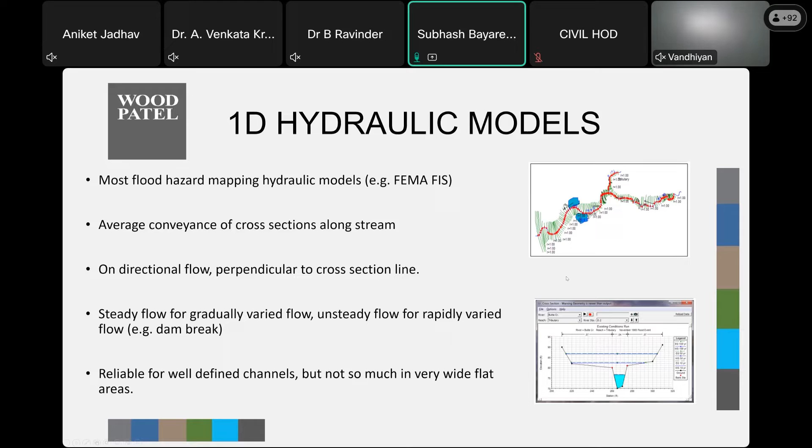Whereas with the 2D model, now we're representing the study area in the form of a 2D plane. Therefore, you can provide an elevation data set for your entire study area, and all of that will be taken into consideration within your 2D geometry. So it accounts for flow splits in smaller areas.

I'm showing a snippet here with the flow arrows showing where the flow is going. Now, if I have to capture this in 1D, I will miss out on flows that are going in the west to east direction. So that's one of the advantages of a 2D model.

And also, you're not relying heavily on the engineer's judgment, whereas in 1D, your engineering judgment is extremely important when drawing the cross-section lines perpendicular to the flow direction, and also the spacing between cross sections. And 2D models are inherently unsteady, so they always account for volumes, whereas 1D models can be steady state. Steady state means it does not account for volume because it's infinite volume.

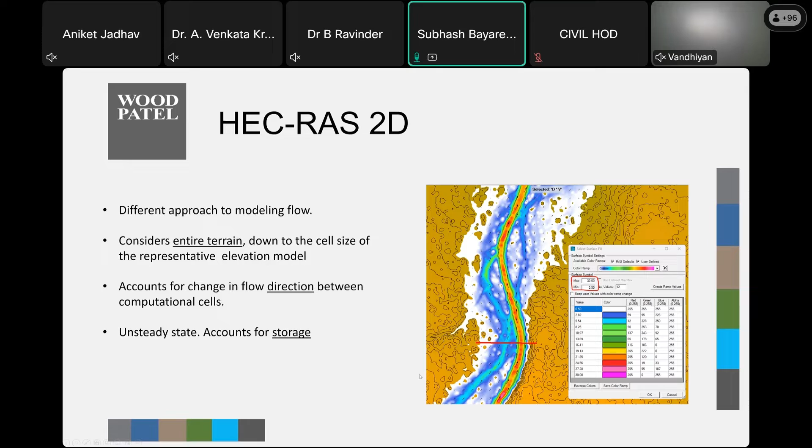Now, what data do we need for developing a 2D model? We need terrain. The terrain is an elevation data set.

Looks like another user is having audio issues. Is it possible that issue is on your end? Because it looks like the other individual has mentioned the audio is pretty clear. It's clear, sir. Please.

Okay. Obviously, when developing a model, your model is as good as your input data. An elevation data set is basically a GIS data set in raster format. Since you all have a civil engineering background, you understand when I say raster cell size: the smaller the cell size, the more detailed the elevation data set is. That means you have an elevation data point at more locations and at higher density.

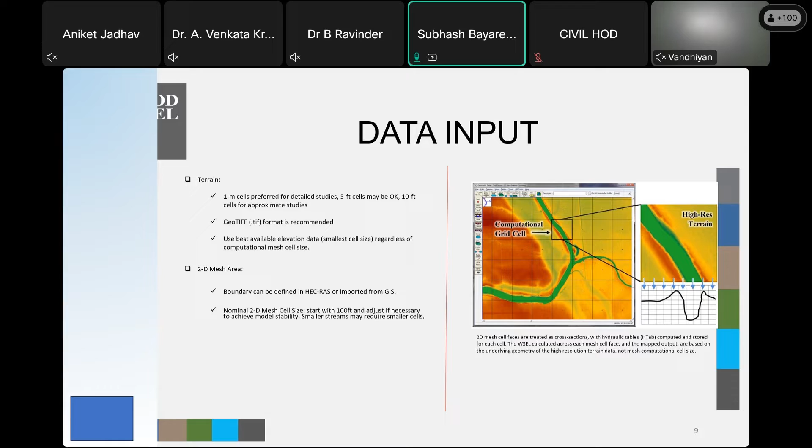Now, a 2D model requires the boundary of the study area, the area you're studying; it's a polygon boundary. And then you need something called a Manning's N value. Manning's N value is basically the roughness of the surface. Imagine a concrete channel versus an earthen channel. Both will have different levels of roughness, different levels of friction, right?

A concrete channel has a lower friction coefficient, therefore a lower Manning's value, whereas a man-made earthen channel is going to have a slightly higher N value, but it's still lower than, let's say, a wooded natural channel. They tend to have a higher roughness. That means they tend to impede flow of water.

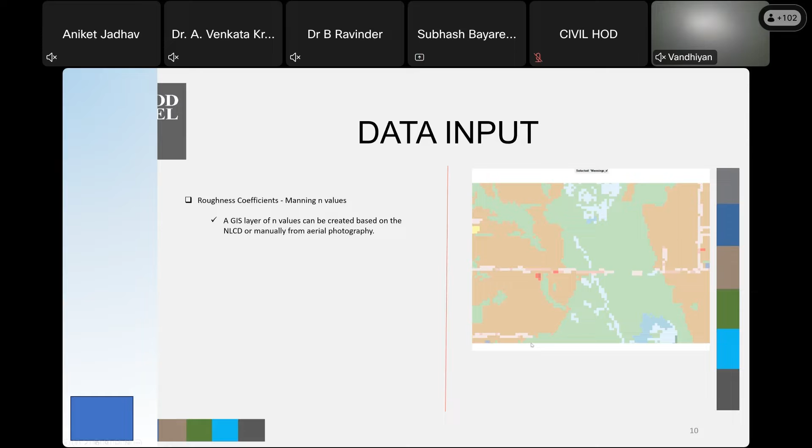And you need to provide boundary conditions for the model. Boundary conditions can come in different formats. The new rain on grid is applied for the entire model domain, the entire polygon that covers the study area. You can apply rainfall on the entire area. That's one form of boundary.

But more commonly, because rain on grid is fairly new, and also when you're analyzing a large waterway, again going back to Krishna River, which has thousands of square kilometers of drainage area, you cannot simulate rainfall on that entire watershed. Instead, we take flow data from flow gauges and apply that as a boundary condition to the model.

And then we need a downstream boundary condition. Where the model ends, the mass coming into the model, which is the volume of water flowing in through an upstream boundary condition like the hydrograph or the rainfall, needs to get out of the model. So you need an outflow boundary condition. And there are initial conditions. Now we are getting into the nitty-gritty of model development. I don't think we have time for that in this presentation.

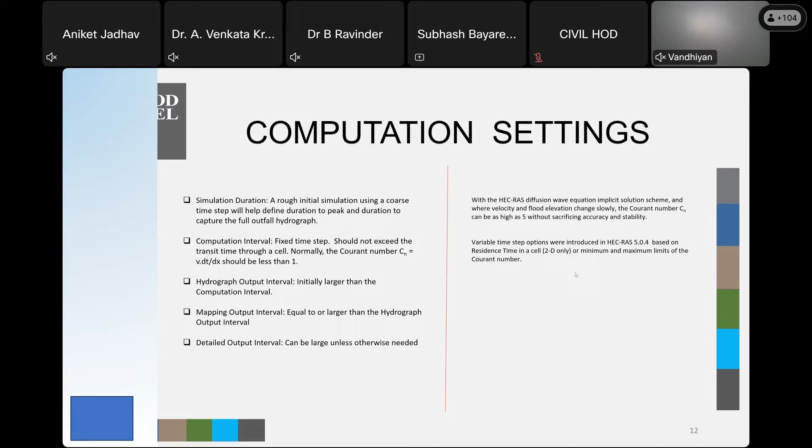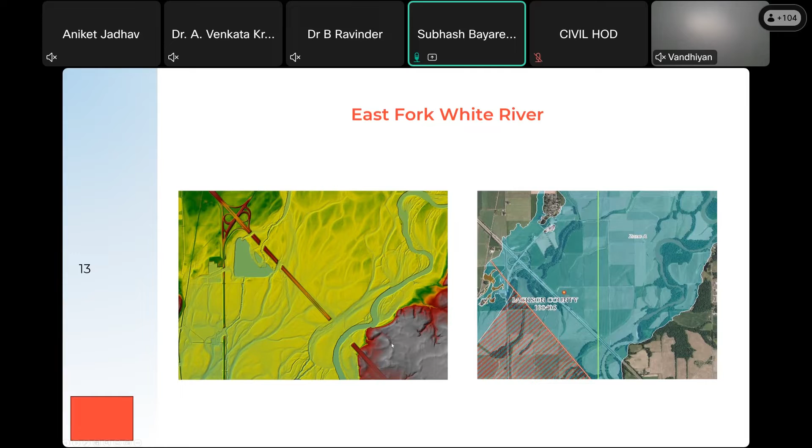Now, when analyzing this in 1D, we will draw cross sections upstream and downstream along this river, and then model the bridge as a one-dimensional hydraulic structure. This is how we'll model it, and then it gives us a water surface profile along the study reach, and you can get a cross-section view of the flow through the bridge opening. And you can notice here the water surface elevation is constant. That's because it's a one-dimensional model.

In a one-dimensional model, it assumes the flow is perpendicular to the cross section, and it can only have one water surface elevation throughout the entire cross section. Now, when you're looking at a span of 8,000 feet, that's not realistic. There is no way it's one constant elevation. So our bridge design is going to be flawed. We might be underestimating the water surface elevation in some areas. We might be overestimating it in another area.

And it also means, for example, if it is overestimating the water surface elevation, the depth of the flow within the structure is greater than what it should be otherwise. When there is greater depth, it is conservative in terms of the water surface elevation, but it underestimates the velocity through the bridge structure. You can see here in this output, the overflow structures.

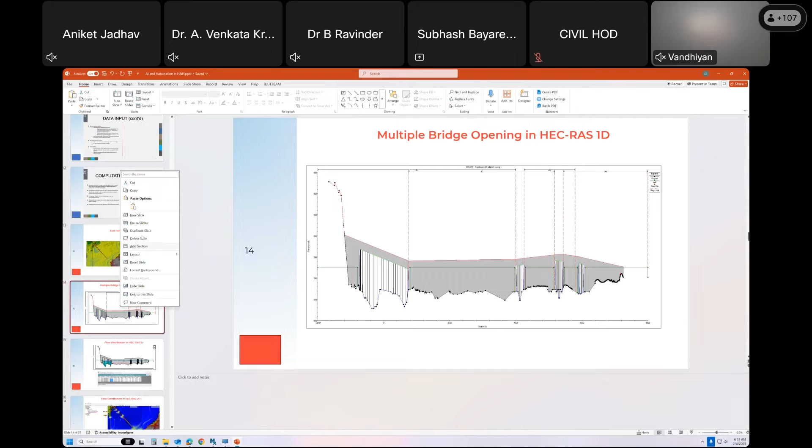So bridge 1 is the main one, the bigger one, which has 81,000 cubics of water going through it, whereas the rightmost one only has 4,000. And the velocity here is 1.7 FPS, which is, sorry, okay, which is not very accurate, and we'll see why.

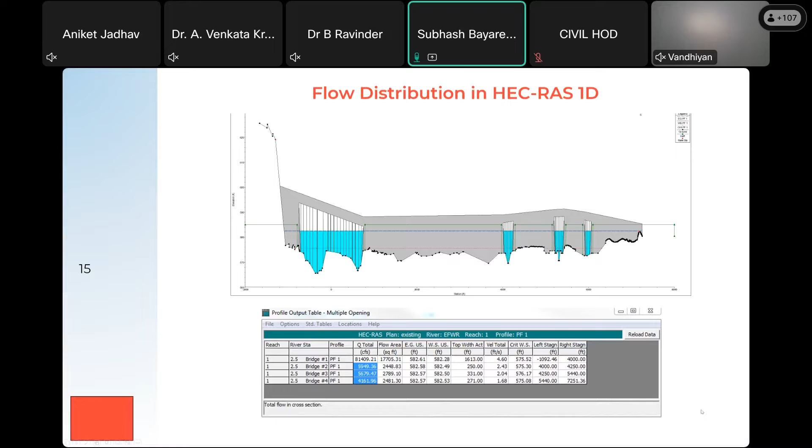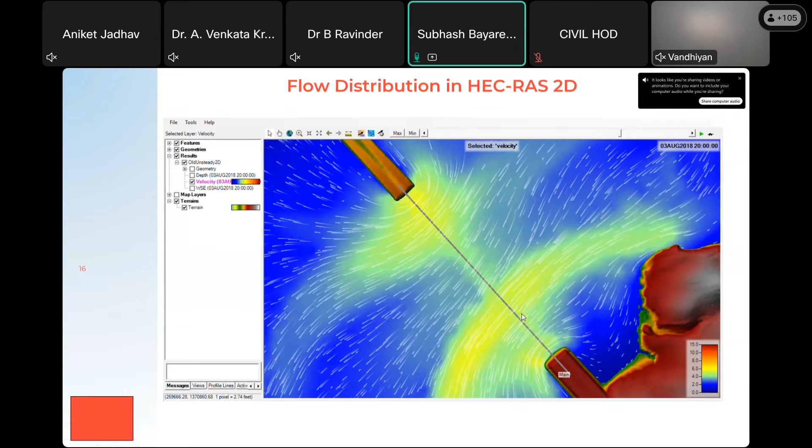The 2D model tends to do a better job capturing the flow distribution across a wide floodplain than the 1D model. And it also provides this beautiful animation that shows you where the flow is ineffective and the direction of the flow. So you can see here the velocities are about 5.5 feet per second in the main channel at its highest. And then when we go to the overflow structure, and we should pan there shortly, you'll see it gradually increases in the overflow structures. Look at that. That's almost 8 feet per second, approaching maybe 9. Yeah, there is 8 feet per second, 8.5.

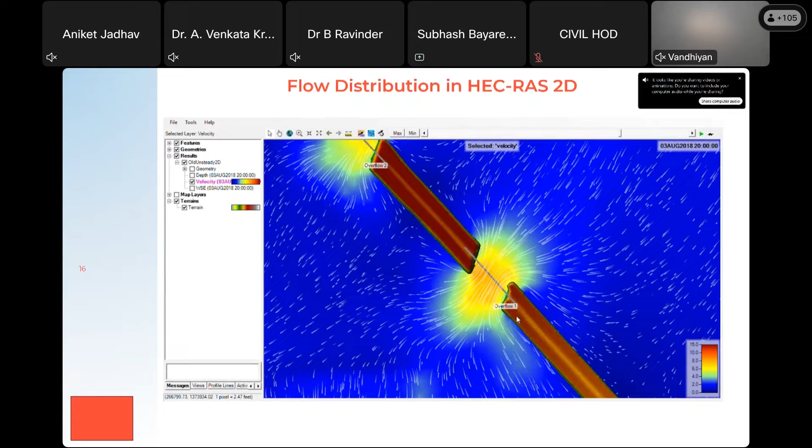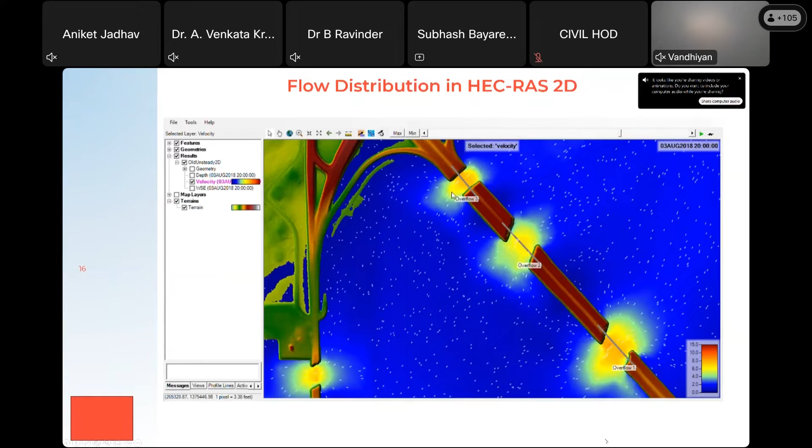You want to capture the high ground of that roadway. A mesh-based model will put a cross-section line, a face of the cell along that ridge or crown of the roadway, and you can enforce. You can do so by drawing break lines. A 2D mesh is very versatile. You can manipulate it so that you can have a face wherever you need it, and when you have a face, that means it captures the high ground. Whereas in a grid-based, that entire grid only has one elevation. It's not a cross section. It's one elevation.

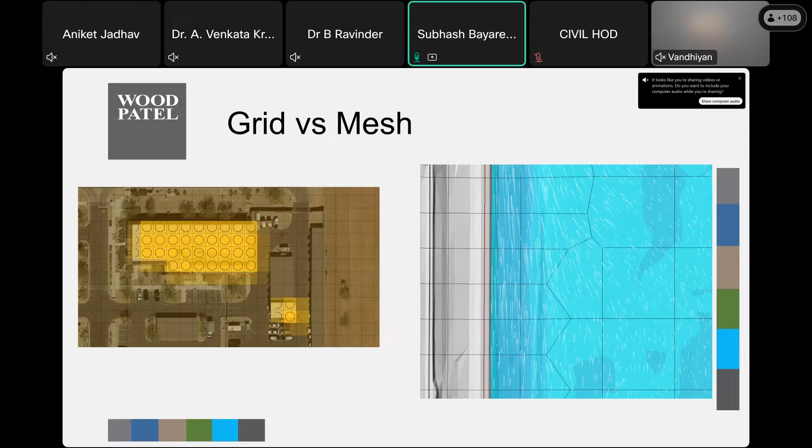Anyway, so at the end of the day, all these models are models. They're not reality. They say all models are wrong, but some are useful. So our goal is to create a model that best represents what could happen, and use that model to come up with action steps.

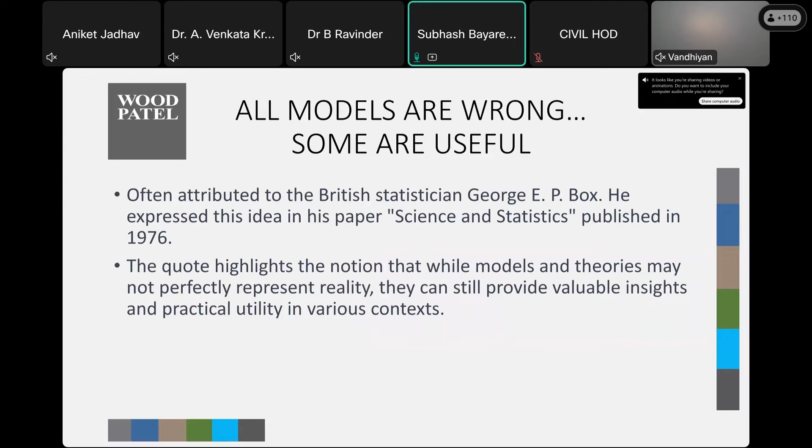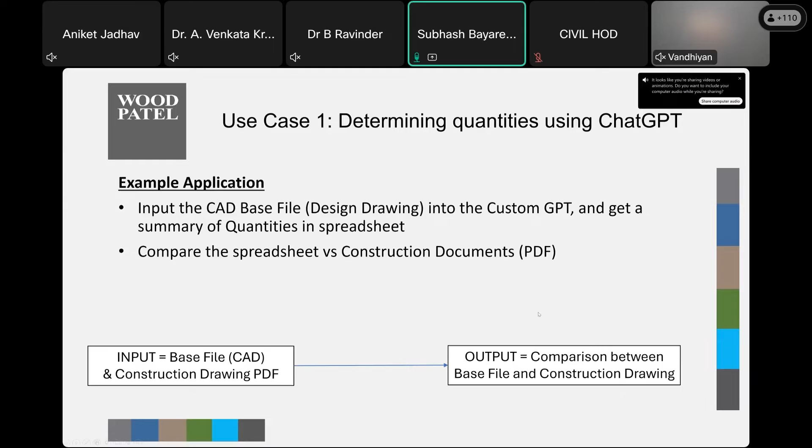Now let's get into usage of large language models in H&H studies. Use case 1, as I mentioned at the beginning of the meeting, determining quantities using ChatGPT. Here, we'll provide a base file that's a design drawing into the custom GPT that I created to get a summary of quantities in a spreadsheet format. And then that spreadsheet can later be used to compare with the construction drawings. So the input is a CAD file that has the design drawings, and the output is a summary in the form of a spreadsheet. So these are the steps that are involved.

So this is a more thorough case. I went ahead with the entire process where we will be processing the PDF also and then comparing the results. But given the time constraints, I will be going over using ChatGPT to give us the quantities, and we'll stop there. We're not going to get into the design drawings in the PDF format and how these two can be compared. But really, for the objective of this meeting, if we get to getting the quantities using the LLM, that meets the objective of what we're trying to do here.

So to do that, we need to convert the CAD file into a GIS readable format, because as of now, ChatGPT cannot read Civil 3D or MicroStation, which are basically CAD files, but it can read GIS files that are developed using QGIS and ArcMap. So when we provide the GIS readable format data to ChatGPT, it performs spatial analysis within the GPT, then performs data interpretation, and then provides us the quantities.

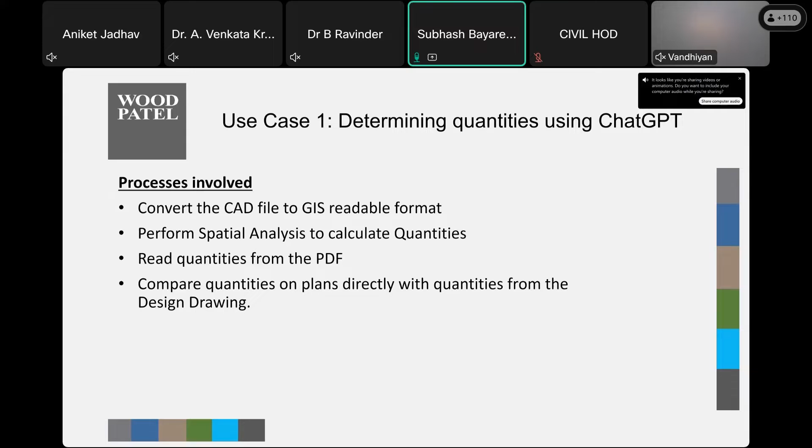So step one, I'm going to take my CAD file and convert it into GIS data. You can easily do that by importing it into ArcMap. You can drag and drop a DWG file into ArcMap. DWG is the format that AutoCAD or Civil 3D uses. And here, what we're looking at is a residential development out in the boonies, out in the desert. I'm showing the proposed lot layout here. As you can see, when you build that close to the existing wash,

you need to protect the development against erosion. I'm going to step out of the presentation for a brief second. I want to give an overview of the project first so that it's better understood.

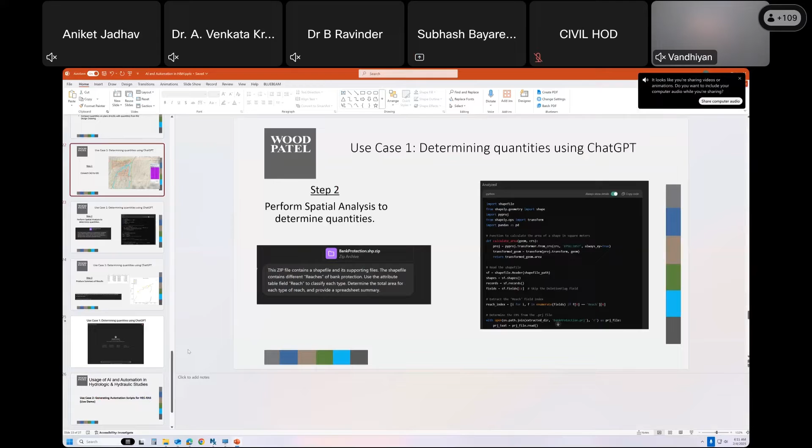So here is the project. It's currently undeveloped, but this is the proposed grading. We will be raising the ground, blocking the flow, routing the flow around the lots, and then when we do that, we need to protect against erosion due to the flows.

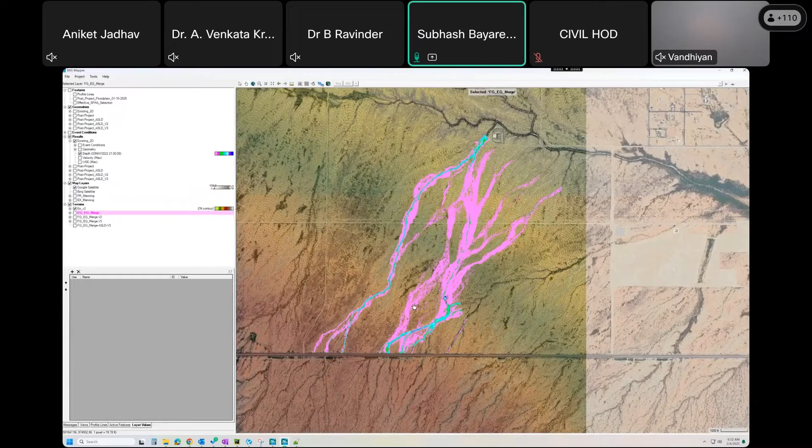And here is a model that shows what's proposed. But first, let me show the existing. So that's the existing model results based on our hydraulic analysis using the two-dimensional model, and that's based on the existing topography. Now, when we switch to the proposed topography,

it won't go through the project site. It's going to go around it, obviously. So we are changing the flow patterns. We're forcing flow around the development, and we identify areas where we need to provide erosion protection based on the velocities. Based on the flow velocities, we're going to identify areas where they need protection and what type of protection.

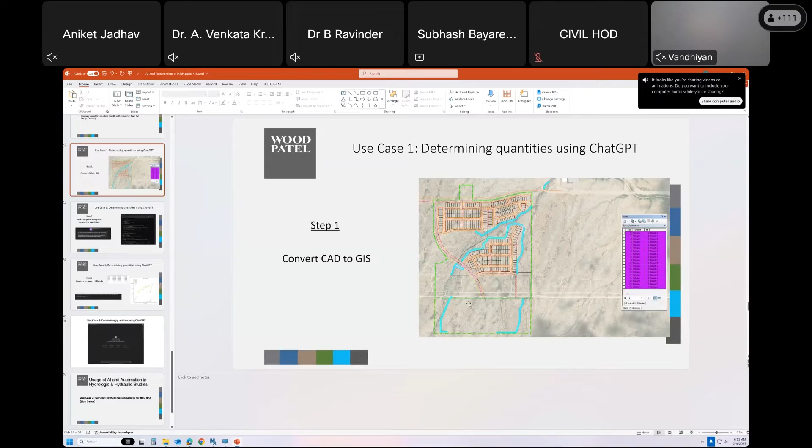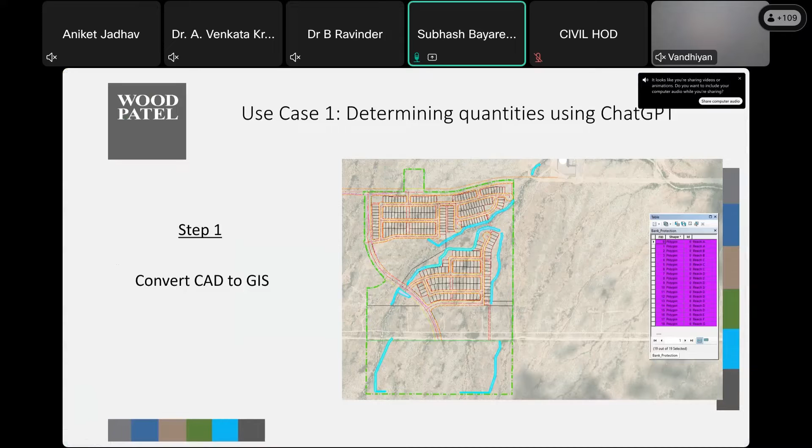So here, going back to the presentation, the highlighted part is our bank protection. Now I have that in the CAD format. I need to quantify that. So what I do is I convert it into a shapefile, and then I provide a prompt to the GPT asking, hey, this zip file contains these reaches of bank protection, and in that

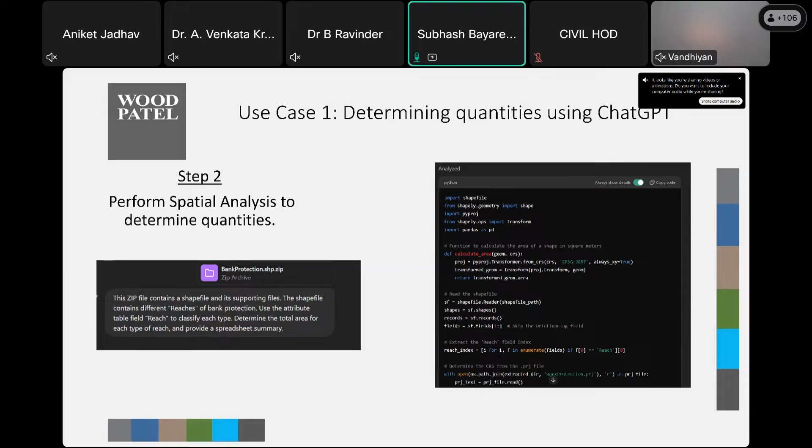shapefile, I have a reach type that classifies the type of reach, basically classified as A, B, C, D, E, F, and G. And I wanted to determine how much area each reach covers, each type of bank protection, and also the quantity of it. And it should provide me an output like that spreadsheet table, where it gives me the total area per reach and the volume of that quantity, the rock.

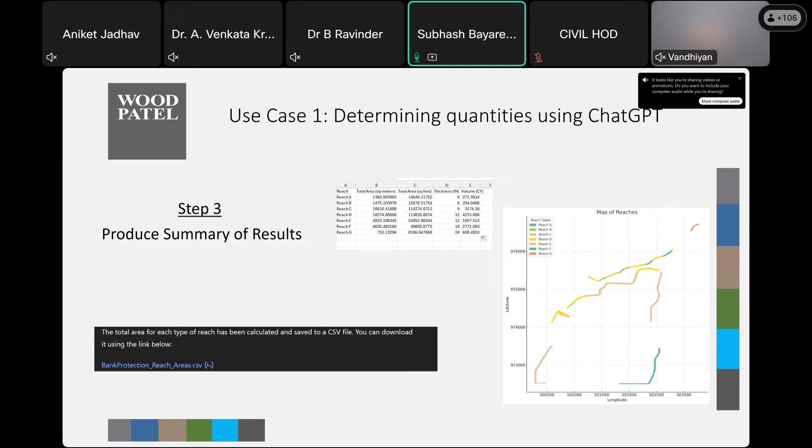So this is a custom GPT I created, and we'll be providing that prompt, and then provide the zip file. Determine the total area. I only ask for total area at this moment in the first prompt. So it's going through the zip file, extracting every file within the zip file. So you can see there is bank protection, all the shapefile and its supporting files are being extracted. Now it's reading the shapefiles using the appropriate libraries.

And it provides a summary of the area covered by each reach. Now I want the volume of it. For the volume, I need to provide thickness, like how deep the rock is. I'm asking it to assume 12 inches. So then it does the simple math, area times depth, that's your volume. And not only does it do that math, but instead of cubic feet, we asked for cubic yards, and it also does that conversion on the fly. So that's one use case.

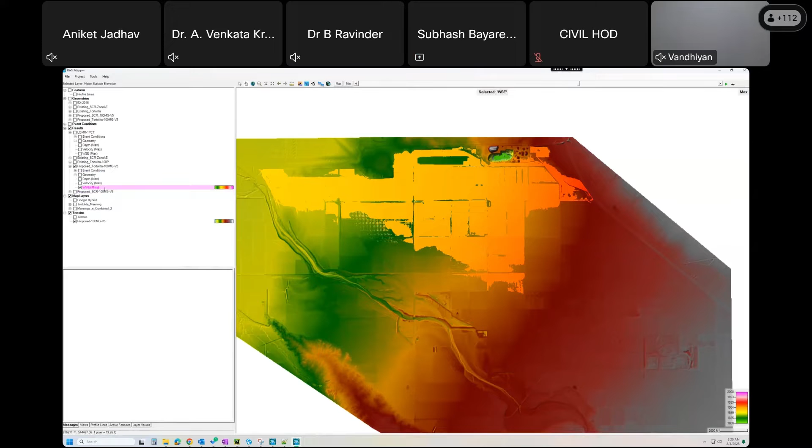And we also have the other flooding source called Tortolita. So that's Tortolita. Now I want to create a water surface elevation layer that is a result of the maximum of both these flooding sources. So let's say this area has 1903 water surface elevation resulting from Tortolita, and less than that from Santa Cruz. I want the highest of the water surface elevation to be shown in that area so that I can tell the contractor to put the panel above that maximum water surface elevation.

Now, how can I do that? HEC-RAS has a new feature called calculated layer, where you can provide a script to generate layers derived from your input. You can create more output by performing math operations using the script. I'm not a programmer myself. Most engineers are not, but we can use these LLMs to help us accomplish it, because I know the process. I just don't know how to do it in the programming language.

So here, my input is going to be the two maximum water surface elevations from the two flooding sources, and that is Tortolita. I'm going to call it variable 1. I'm going to go for the maximum here. So that's V1. And the second one, Santa Cruz River, that's V2. So I have two variables, and I want the result layer to show the maximum of those two. I'm going to go to ChatGPT here, and here is the prompt.

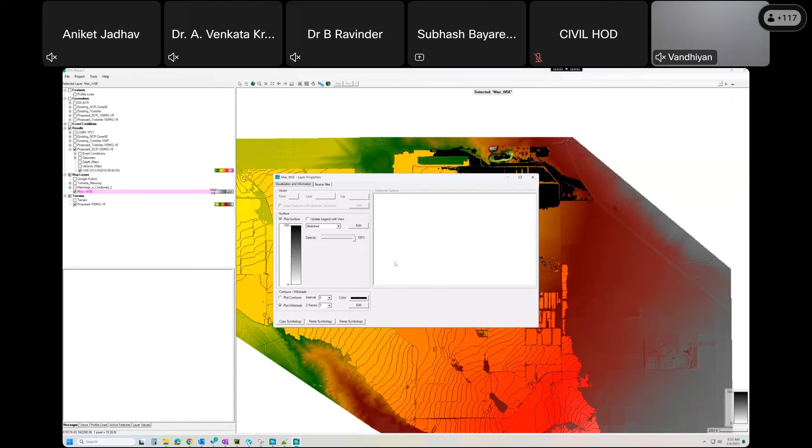Why is it all blank? Because you can see the number, it has the data. It's just shown differently. Everything over 100 in elevation is shown dark. And obviously, our ground elevation here is 1800, so the water is going to be higher than that, and that's why everything is dark. We can change the symbology to match that of the result layer. So I'm going to copy this symbology. And I'm going to turn off the results.

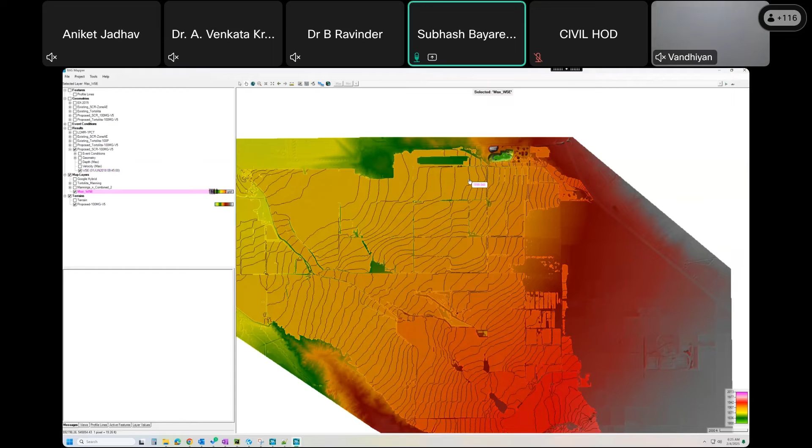Now it created a composite water surface elevation layer. You can see the contours beautifully, the 1 foot water surface elevation contours. And I can now tell the contractor, hey, you have to be at least 2 feet above this elevation in this location. And they don't have to use one constant elevation. They can use varying elevation based on this output.

And another demo we're going to go through is, as I showed here, this is the area where they're putting the solar panels. So one of the considerations is you need to calculate the scour depth for each of the posts that carries the solar panel. And how do I do that for the entire area? I have thousands of posts that go in there, and I can't give each post its scour depth individually. It's not feasible.

But instead, if I provide them a scour depth map, a map showing possible scour depth over the entire area, they can use that and say, hey, this entire area we're gonna bury the posts at least by this amount of depth, which is usually greater than the scour depth. So for that, we need to calculate scour depth. And that's not readily generated by HEC-RAS, but we can again use that script to generate scour depth. For this, we're going to use the CSU pier scour equation.

For those of you who are not familiar with it, the CSU pier scour equation is used for calculating bridge scour around bridge piers, which are not abutments, but the columns that hold the bridges. And we have that equation already derived by the experts. There are correction factors that we need to apply based on the pier geometry, based on the bed condition, but we can make an assumption of those correction factors given that we will be working with the same geometry of the posts. They're all circular in nature.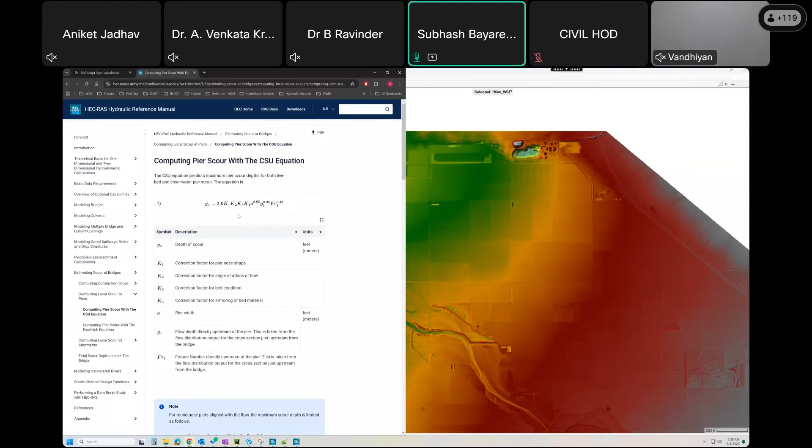But if I really want to get that detail, I can also create a raster layer that covers these correction factors based on the location. We're not going to do that here. So what I did is I put together the scour depth equation here. And it's basically a simplified form of this pier scour equation. As you can see, the input I need is the depth of flow and the Froude number. And we have those readily available within HEC-RAS.

So within the results section, you have depth, water surface elevation, velocity, and among other things, there is a Froude layer. Okay. Calculated layer. Okay, now my input is going to be max depth, and then Froude number. So these are my V1 and V2. Now I'm gonna tell ChatGPT, hey, I want to calculate the pier scour. This is the equation for pier scour, and these are my variables, V1 and V2, and V1 stands for depth, V2 stands for Froude number. I'm gonna ask it to create a code that performs the pier scour calculation. And that's exactly the prompt I wrote here.

And we can continue that chat that we already initiated. So I come here. I also need to create another layer for pier scour. The equation for pier scour is as follows. I provide the equation for scour depth, pier scour depth, and then I tell it y is the depth, Fr is the Froude number, because that's the nomenclature I used in this equation. And then I correct it saying in the code, V1 is y and V2 is Froude number.

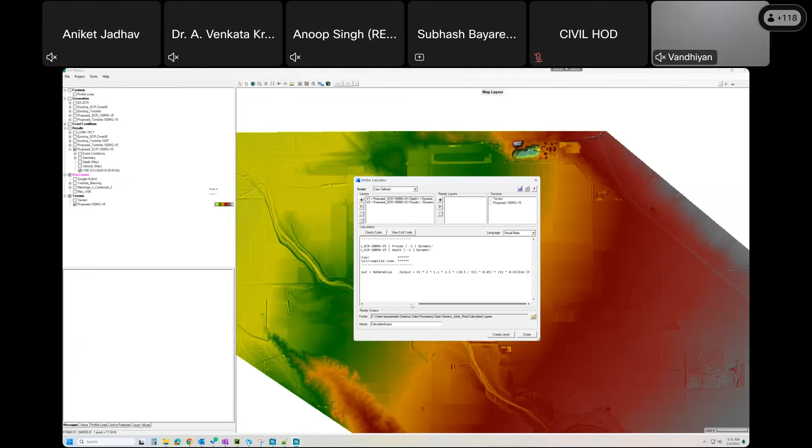So that's my demo. As you can see, if I had to do this by hand, that could have taken much longer. Obviously, this is not created by ChatGPT. It only helped us with the code, but those are some of the use cases where we can use these automation tools in our workflows. So with that, I will open the session to Q&A.